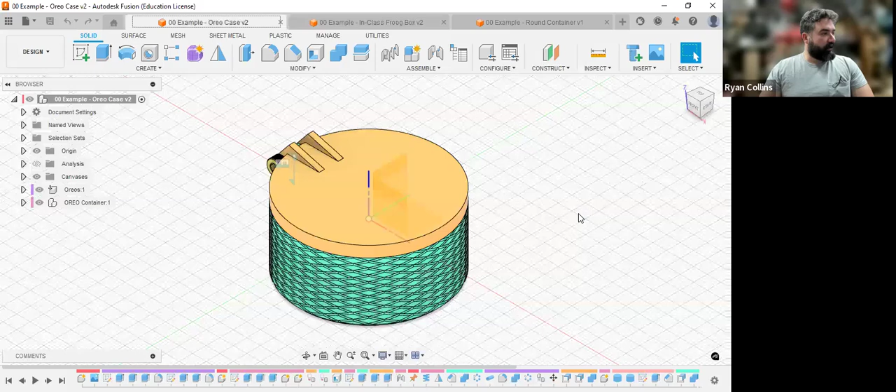We have a simple example here, and this is just on auto color. I can change back to the assigned colors, whatever. This is a rounded box, so instead of a box, it's a cylinder. But I can click and drag open the surface, and it is a container for a couple of Oreos. So when I say it must have a modeled object within, you're responsible for modeling an object, either importing it or if you want it to be something else, you're responsible for modeling that object, in this case, an Oreo.

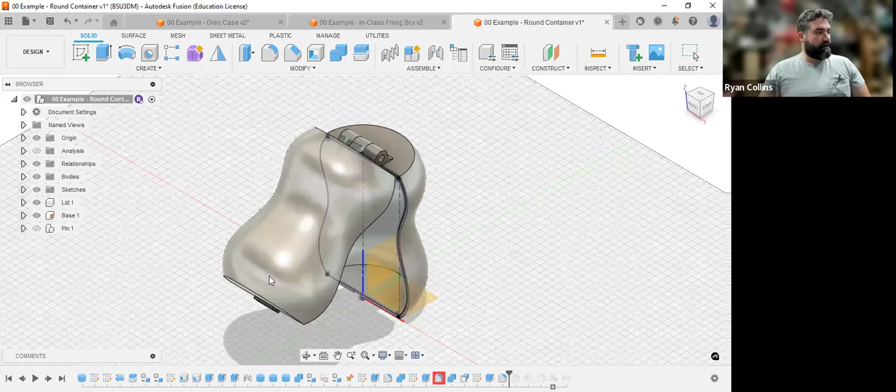Different example - I just have a section analysis on this. It does not have to be square or cylindrical. You can use the revolve tool to make a custom profile. This opens and closes as well, clamshell style. Now the orientation is just for convenience, but one of the things I want to show you in this is the hinge. It's a simple hinge, in this case with 3 lobes, 2 connecting to one side of the object, 1 connecting to the other side.

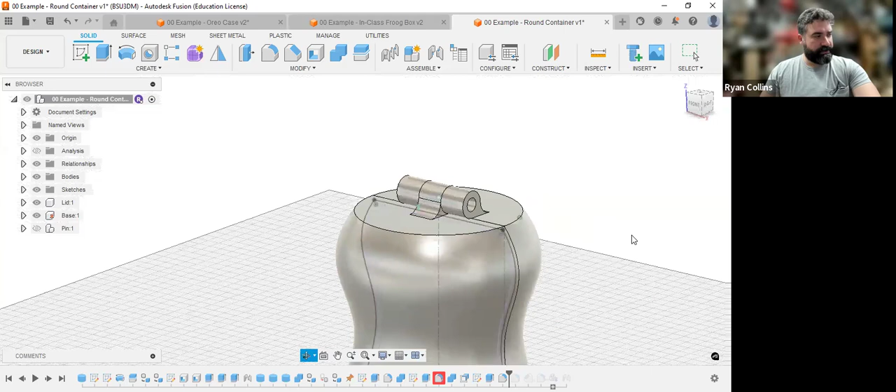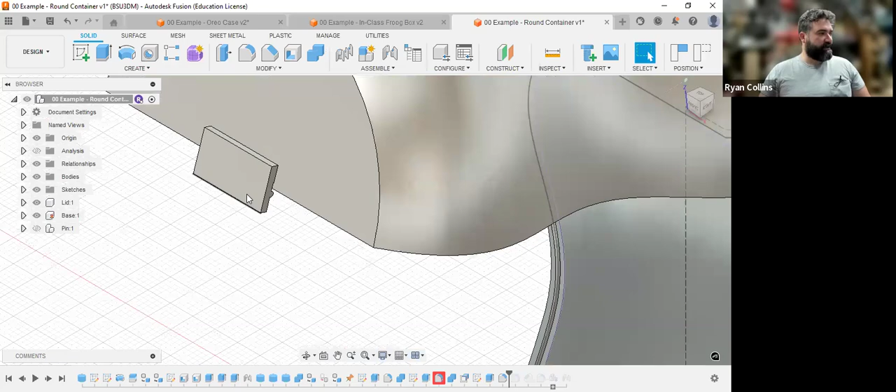Now, this example model has a hole through it. We're going to model something that's more intended to be printed in place with more of a snap fit that would not require a pin, but that can certainly be an option if you like. But the main thing is it opens and closes and also has some sort of a little hinge or catch, so it wouldn't just simply snap closed.

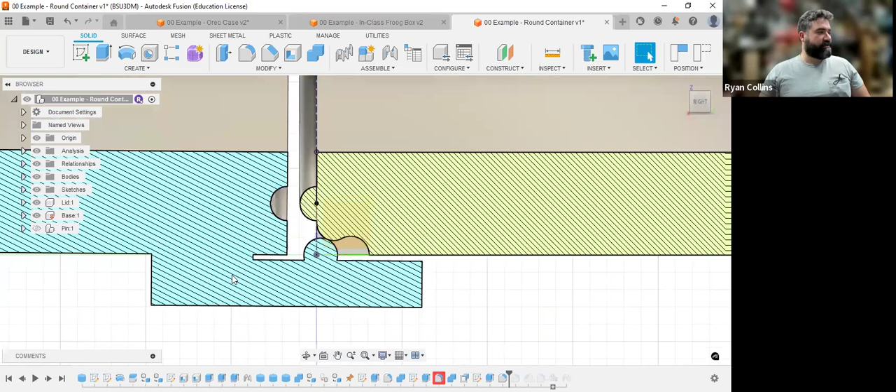If I look at this from the side, you can see this has a simple little model. When I open up the section analysis, you can see it actually has a little divot in there, something just close enough that would allow the plastic to bend and snap back in place and keep the whole thing closed. So you can see the clearance is just so. Now this one has this inset in here also that would technically make this more watertight. I'm not requiring that, that was just an idea, just an experiment.

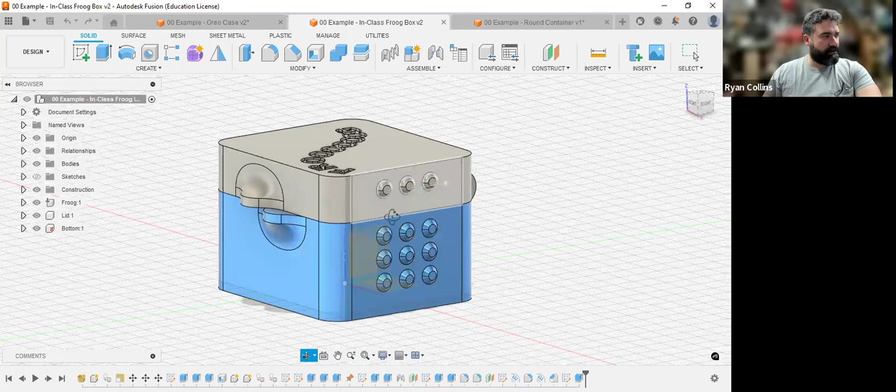Mainly, we're looking at something that, sure, can be a container, has a simple hinge - you can make this as complex as you like with as many lobes as you like. It needs to have some sort of surface features, be that texture or text, but it also needs to have some sort of a thumb catch, something that would help it open or stay closed. In this case, it's just like a couple little thumb tabs you could easily grab onto.

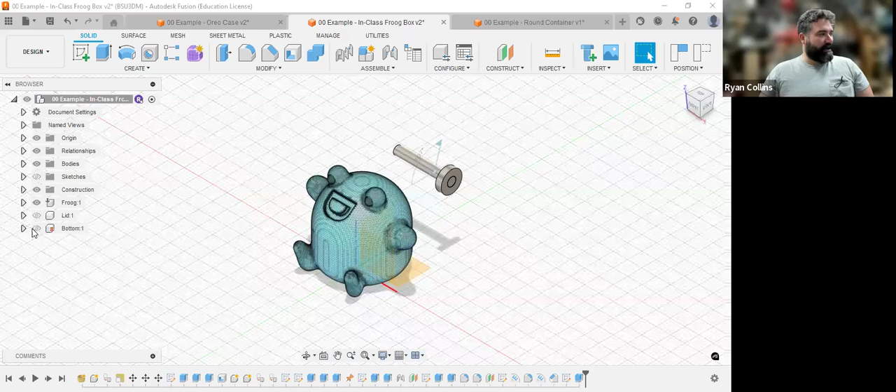Now with this project, this actually houses a ghost frog, and this is simply an imported model from a file sharing website. But in this case, for this model, I want you to actually model the object within. This is just a simple example of what we're going to do.

So to start, let's open a new project. Now dimensions and things are going to be up to you. I'm going to recommend starting with the sketch - we'll start on the XZ plane, snap in the middle. For this example, certainly follow along. We're just going to start with a center point rectangle right in the middle, and just for the sake of building this, let's just say 100 by 100, making it a square, that's okay.

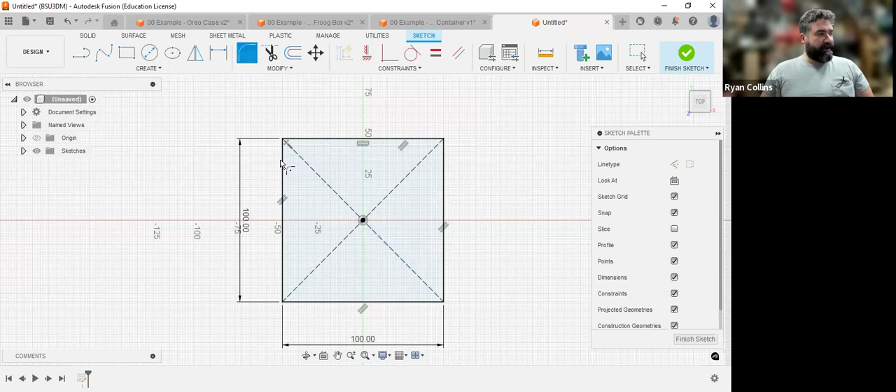All right, that's essentially done - that's just my rectangle. And I say this because if you want to add fillets, you could do that now. Remember, if I just keep clicking around, don't hit enter, keep clicking around from the sides, I'm going to get an error, but this will allow me to link all of my fillets together.

Now, if I click and drag or type in numerically, it changes all of them. Totally up to you, you can add fillets later. This is just an example. Yeah, I get the warning because I changed the constraints.

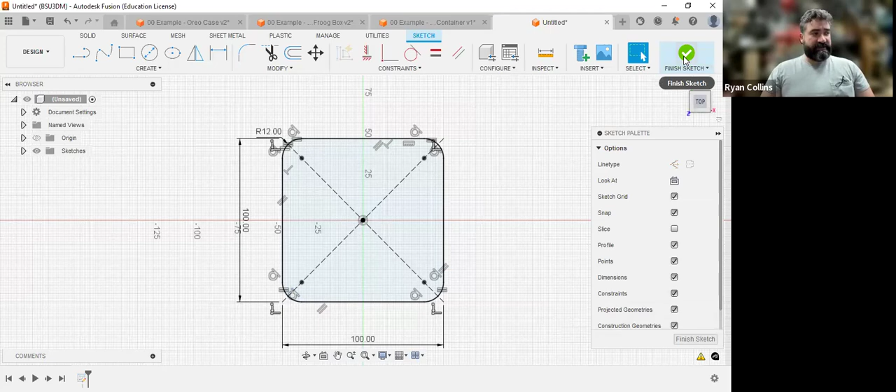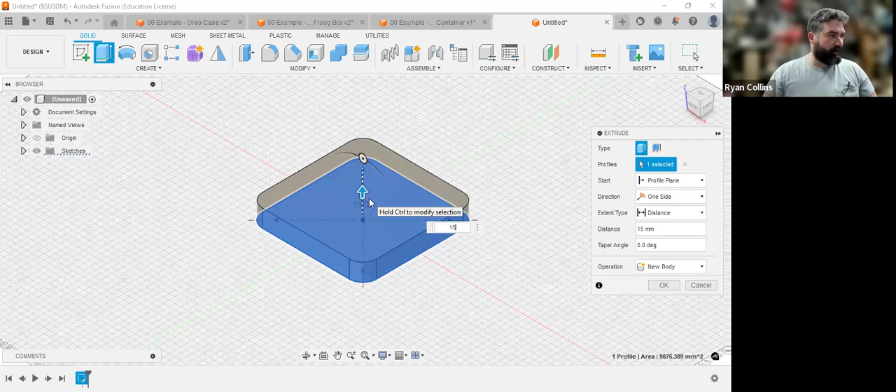It's all right, okay, that's it. Literally start with a sketch, just a flat sketch, what we're going to reference. Now, eventually we're going to need to make different components, but for now we can just make them different bodies. So I'm going to extrude up and down in two separate bodies. From the top, let's go up 15. Doesn't matter, new body. Now it's going to hide my sketch.

You can unhide that, but since it's the exact same profile, technically I could just extrude from the bottom also. Do it again, extrude from the bottom. Let's go down more like -40. Now make sure on the operation you do not do join, I want two separate bodies. Hit OK.

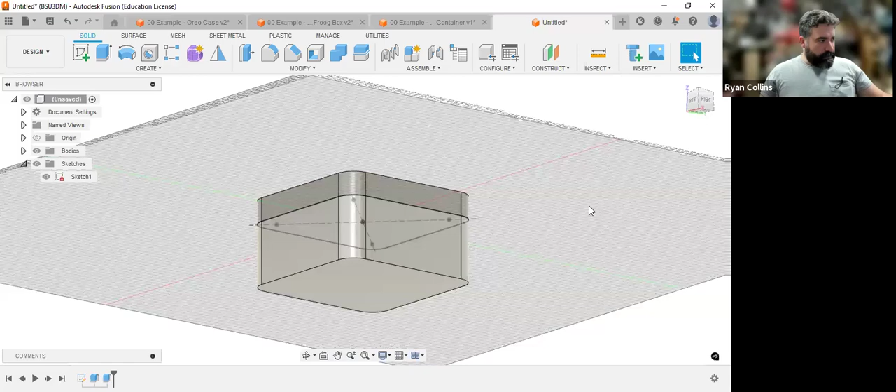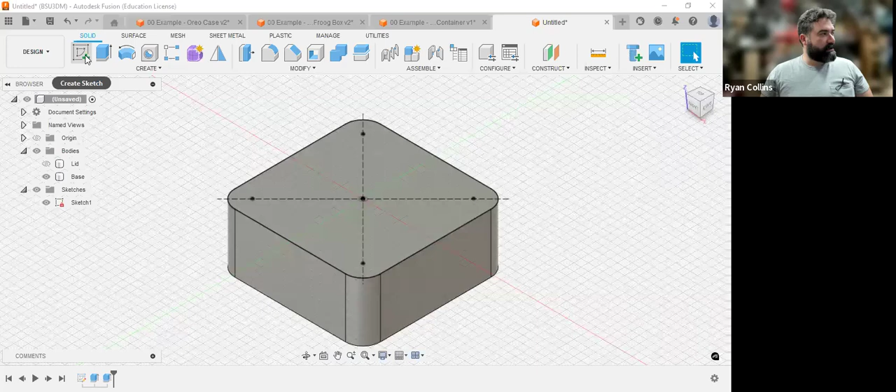From here, I'm going to hollow this out. To do that, you can add, I'll show you two different ways. Let me hide, I'll label what will be the lid and base. So for the base, what I could do is I could have brought up that original sketch, or if you want this to be more defined, we can start a sketch on that face, take the existing face, and do like an offset of the outline.

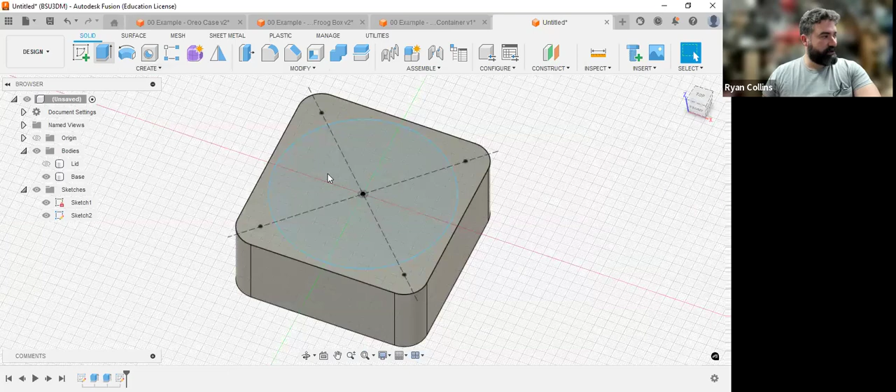First you have to project that, or if you wanted this to be like a custom profile inside, just for the sake of the example, let's put a circle in there. Finish that sketch. Extrude. Oops, not that, I want to make sure I select my circle in this case. I'm going to drag it down to cut.

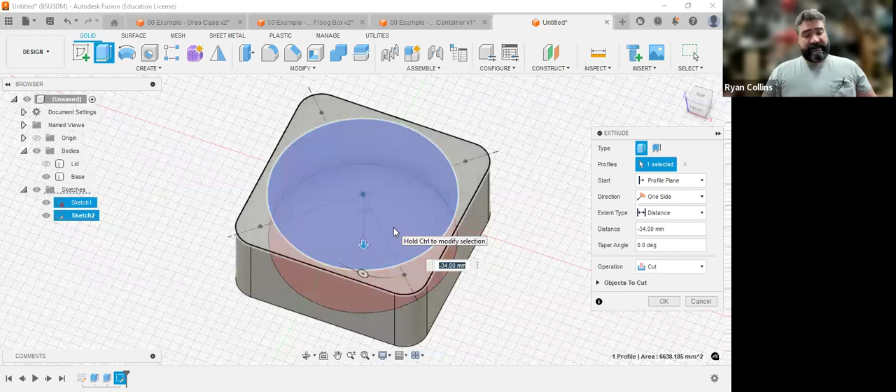Now one of the things with parametric modeling, if you drag down, you can one accidentally go all the way through, which isn't really a big deal, but you can always make it your own dimension. However, what if I want to make sure, if I decide to go back and change anything, because I based this off a sketch, I want to make sure I don't have to recalculate things. In other words, the less math I have to do later, the better.

So what I'm going to do for my extent type, instead of by distance, I'm going to go to object. I'm going to select the bottom face, which is going to cut it all the way through. But then I'm going to do an offset of, let's say like -5, which means it brings it back up 5 millimeters. Hit OK, and I'm going to throw in a section analysis so you can see what I'm looking at here.

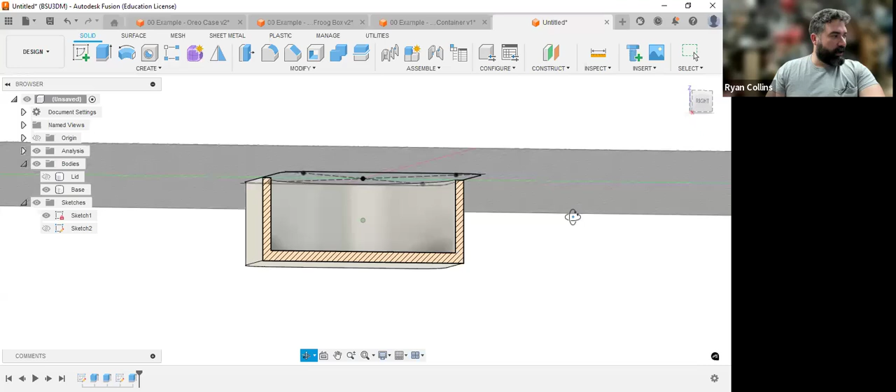So now, no matter what I do, that extrusion will always cut away from the bottom. So what I mean by that is, if I wanted to go back and change how far I wanted that bottom to be, instead of 40, let's make it 45. It's going to recalculate, and the depth of my extrusion is always going to be all the way to the bottom, save a few millimeters back. It's always going to be that distance away. So that's one of the benefits of doing it this way.

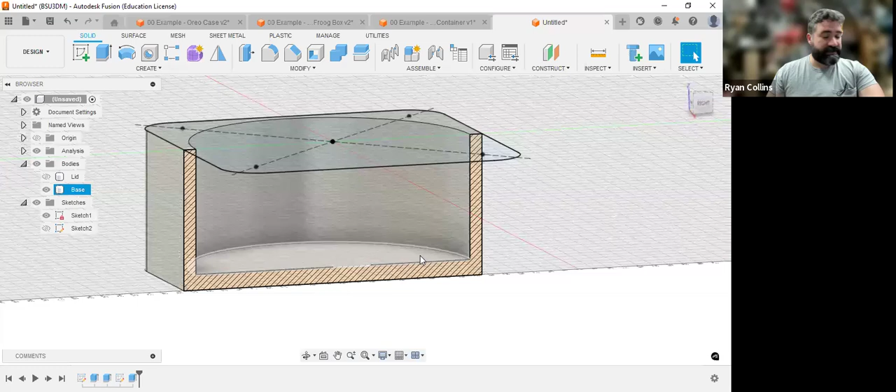The other example is, let's do the lid. And to heck with all of that, just use a shell tool, select the bottom face, let's say 3 millimeter wall, bam, instant extrusion.

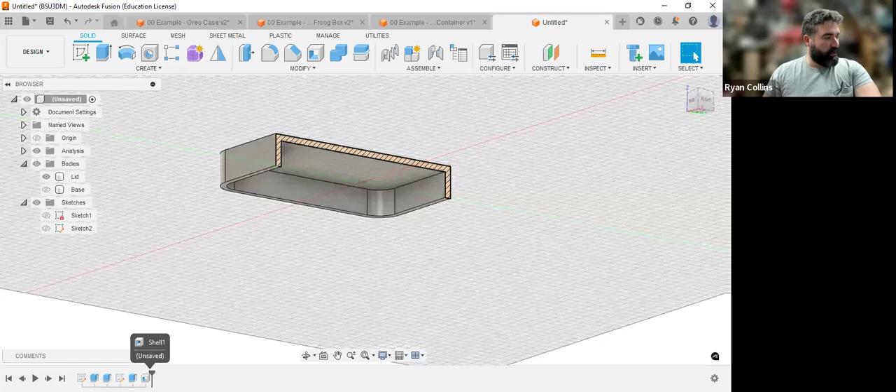And the cool thing about using the offset tool, the shell tool, is before I did that, what if I wanted to round out the top of that? Let's select the top face, and we'll say 5 millimeter fillet. Hit OK. Now when I go back to current, it recalculates, and because the shell tool works like an offset, it also copies and offsets that rounded fillet on the inside, so I don't have to make that copy.

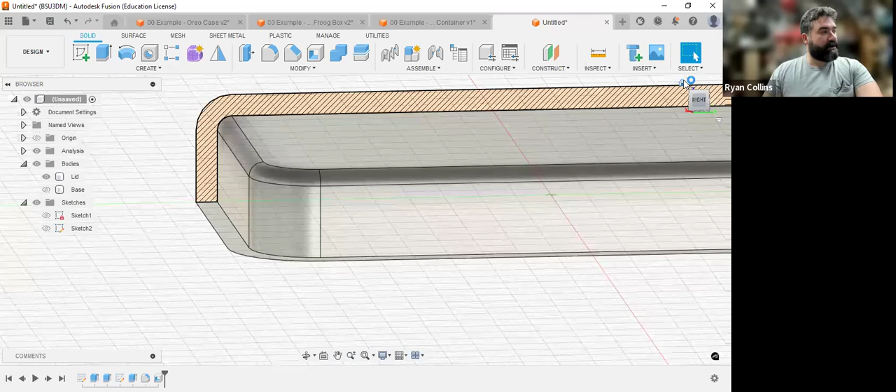So however you want to approach this, it's up to you. If you want to make it custom inside, use a sketch extrude. If you just want to use the shell tool, do that. So I'm going to pause here, let you catch up, make that model, and go from there.

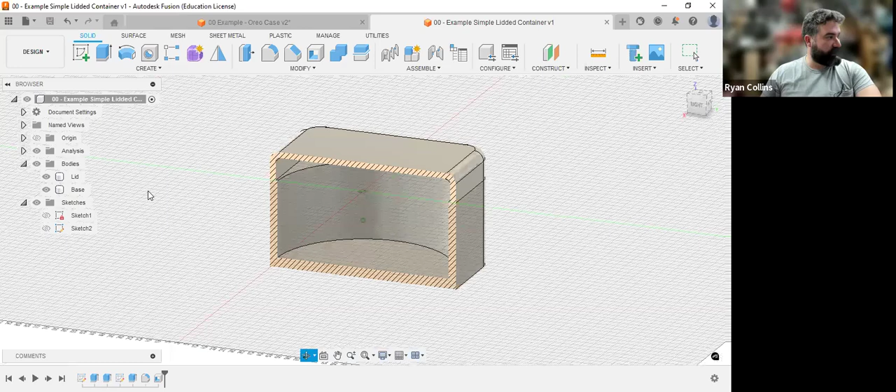Okay, so you made your container, you have it on two sides, you have your two sides. I'll just hide the section analysis so we're seeing the whole thing. Now again, this is important, it's much easier if you make this all, as usual, smack in the middle of your workspace, right smack in the middle of your environment, however you go about it. All right, so the next step is going to be...

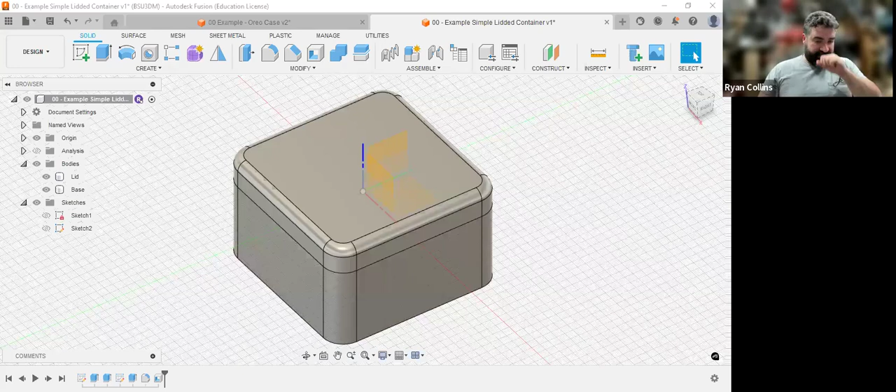I need to make the hinge. Now before I do that though, to make this much easier to work with, I'm going to need to make my separate components to drop this into. So the component tool is over assembly, the first one on assembly, new component, new component. And you can either select things or not, but I'm just going to label this lid.

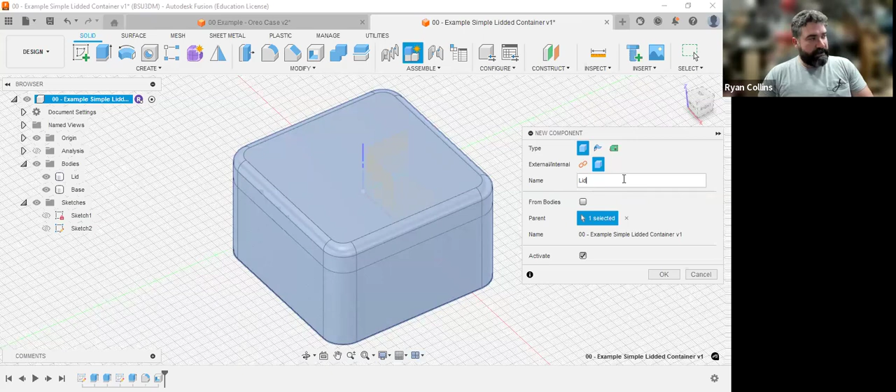One thing to keep in mind, you don't have to do this, but it's really easy to accidentally get a little lost. At the bottom of this toolbox there's a checkbox, Activate. If I don't uncheck this, when I hit OK, my whole project ghosts out. If you look down the project tree, the symbol for my component, which was just a square or a cube, has changed to a little stack of cubes symbol. That's the new components — there's more than one component now.

And the reason for that is it's automatic. Down here you have the new component, the lid I just made, and it is active — see the little circle with the dot in the middle? That's active. If I go all the way back to the very top and reactivate the entire project by checking that symbol, everything reappears.

Right now the component has nothing inside it other than its origin. If I go to New Component to make my other one — we'll say bottom — and uncheck that, it will keep it out here. The reason I did that is because if you keep both your components at the same level, you won't have as many problems. But if you don't, if you accidentally create your component while another component is active, let's just say component 3, now it will nest that component within that component, and you can very easily get lost in your own project.

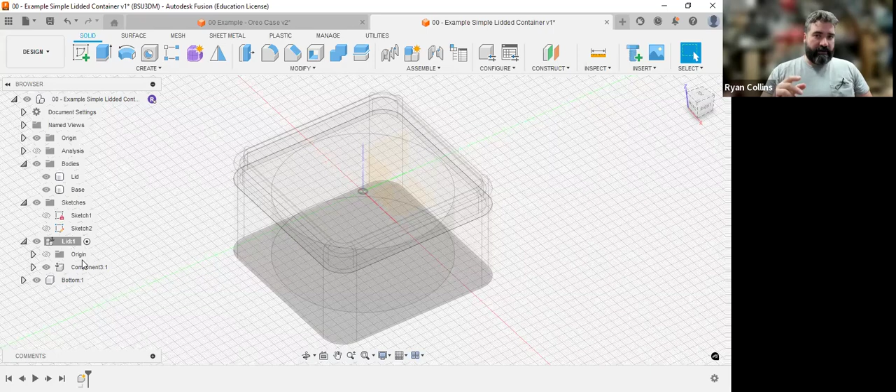Now, the reason you can nest them is for making assemblies. Say you're making a robot arm — you can put the hand on one component, and then within that component, each one of the fingers is on its own separate component. Stuff to that effect — that's why those are there.

So I'm just going to delete that — I don't want that other component, I don't want to get confused. I'm going to reactivate the whole project. And you could just drag and drop bodies.

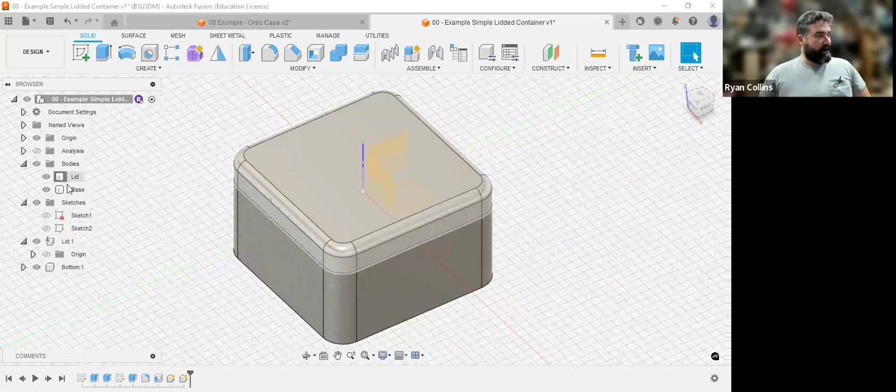Pretty great. So for the lid, I'm going to drag and drop it into the body of the lid, or the lid component — I just mouse over the lid where it shows it and drop it in. Drag and drop for the bottom, same thing.

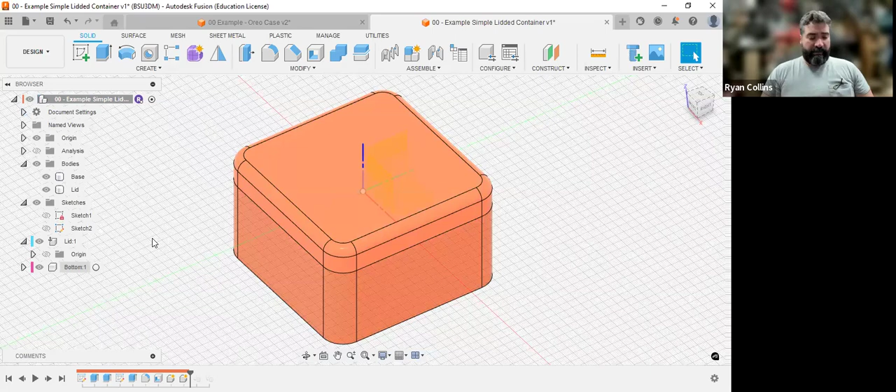Now, so far it looks like nothing changed. But when I use Shift-N — Shift, November on the keyboard — to auto color, it has changed. Let me go back before I did it — see, it's all the default coloring. You can see at the very left side of each component it'll show you the auto color that it's using. That's just there to help you make a little more sense of your project. But when I move them into their own components, it reassigns the auto color, so now each one has a different color.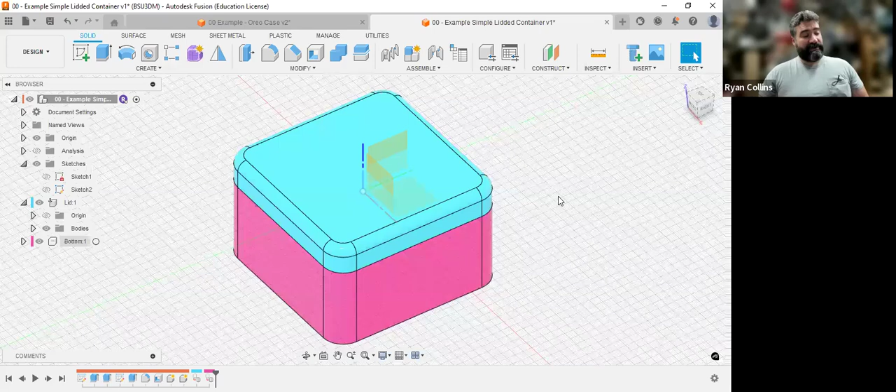Now that makes it pretty easy, because the next step is I have to have separate components to make the joint tool work. But in order to make the joint tool work, I need a hinge to build this off of. So with the entire project active — not each one of the components, the entire project active — because it's important that my sketch stays on the outside.

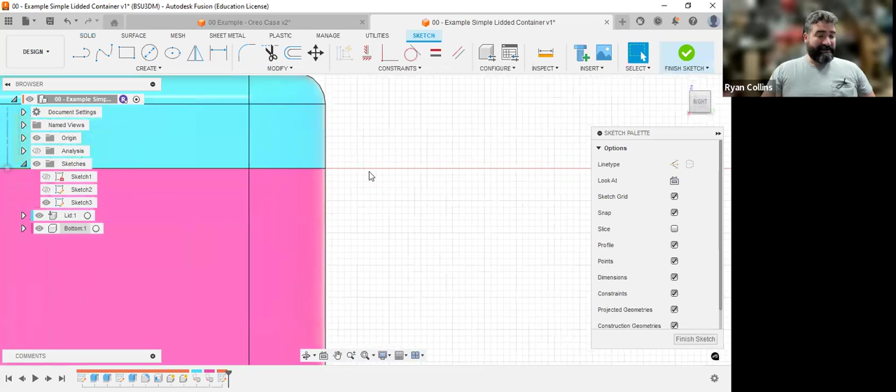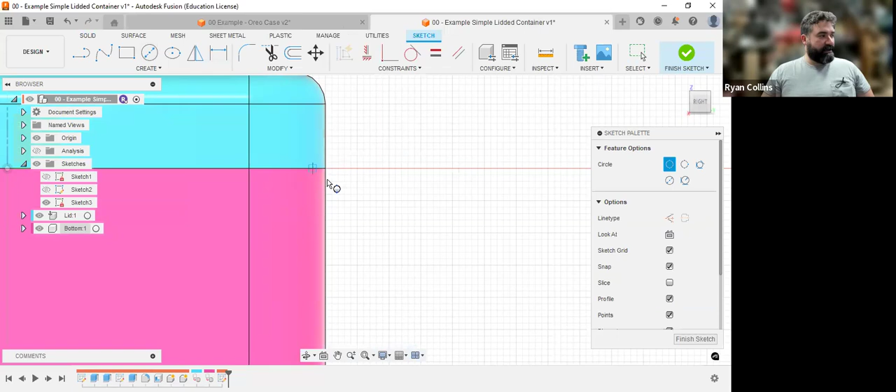So for my model, I'm going to start a sketch, but instead of using a center circle, I'm going to use a 2-point circle. I'm going to start right smack in the middle. Now, sometimes it's difficult to get to that because it's not wanting to select, so what we're going to do is project again — press P on the keyboard, or Create Project — and I'm going to copy both objects, the top and the bottom. Hit OK. So now if I hide those objects, I have a projection, but they're separate pieces, and now I have an easier sketch to work with.

So: circle, 2-point circle, start right in the middle where the hinge will be, and then we'll just draw outward. I don't know, let's say like 10 for now — you can always change this.

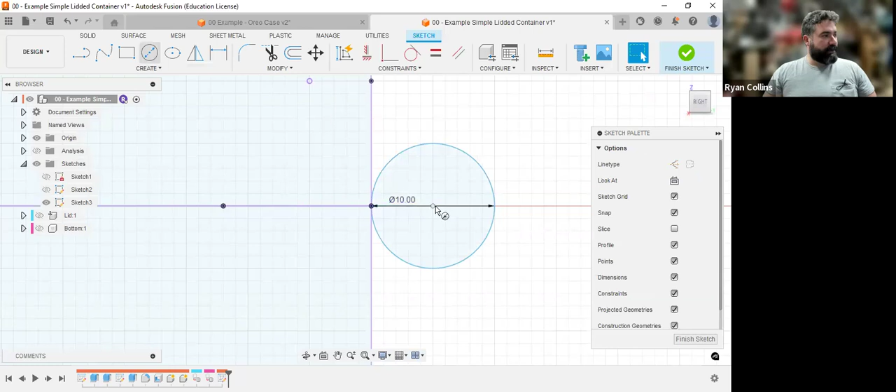Okay, now for reference, I'm going to start a concentric circle in the middle. I don't know, 4, 5, doesn't matter, whatever. And I need, that'll be what the hinge is, and I need 2 lobes.

So I'm going to use a line. Doesn't really matter where, I can start at the top. You can go all the way to the top, you can do it at a tangent, whatever. Do the same for the bottom. Doesn't really matter where, and doesn't really matter where. This is kind of one of those, yeah, that looks about right.

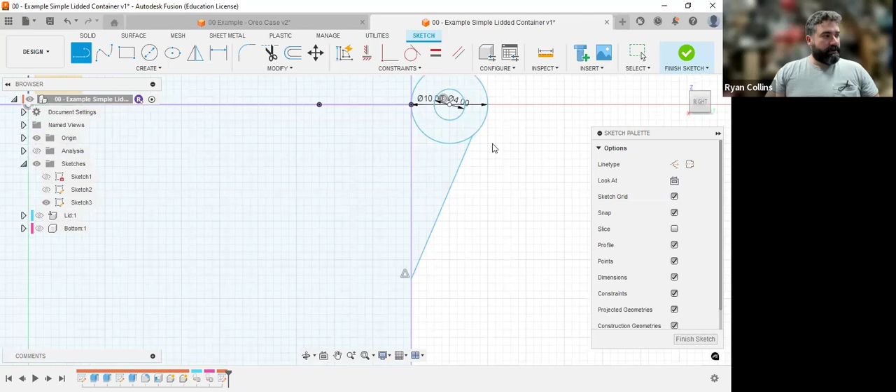If you want these lines to match, or better yet, to be at proper tangent, we're going to use a tangent constraint. Select the tangent constraint on Sketch, select the line I want to be a tangent, and then the circle that I want it to be a tangent to. It resets the line. It stays where it was down here, but it resets where it touches the circle.

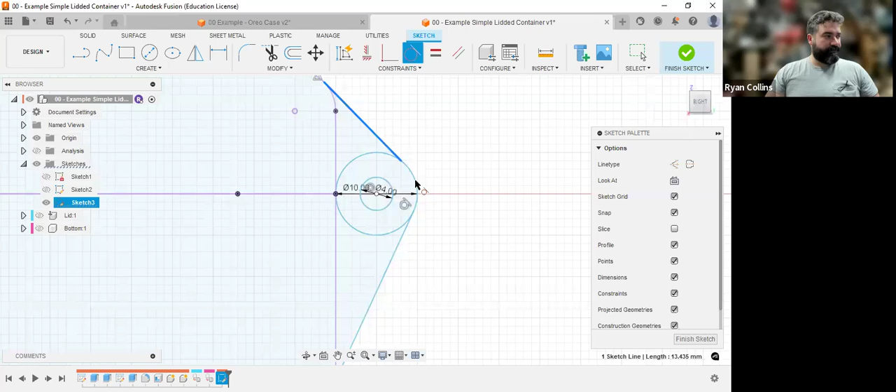Same thing for the top. Select the line, then select the circle. It just resets it, you have a little tangent symbol. If you want, you can do it at the top too, since I have this rounded. Select there, it shouldn't change anything. Yep, because it was already smack in the middle, but now it's both in the center and at a tangent.

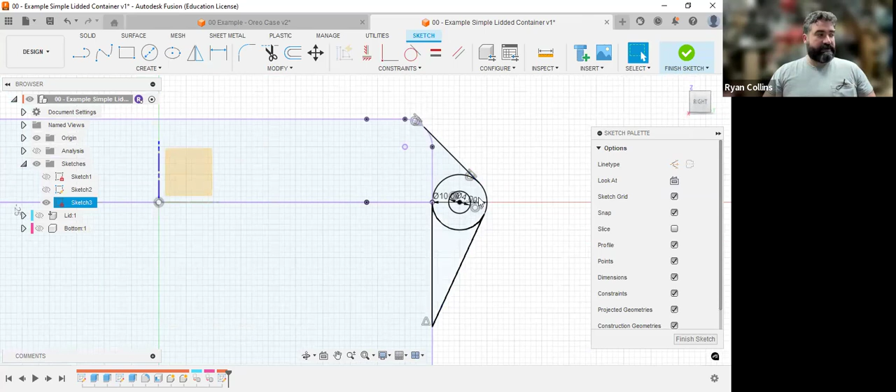And that's it. So a circle, hit escape to get out of that. So a circle, basically with 2 triangles, that's literally it, that is all the hinge is going to be. Finish sketch. Now I'm going to unhide the components.

There we go, so you can see that's all I'm doing. It's just a circle based off of right at the middle where the 2 halves meet, and a triangle for the top, and a triangle for the bottom, or whatever. It's up, you can go straight across if you want.

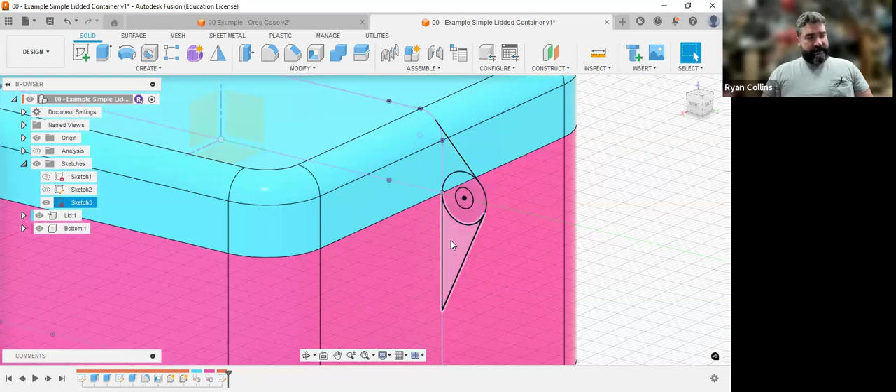Totally up to you. Now, I'm going to extrude these, but I'm going to extrude these with the component active. So I'm going to do the lid first.

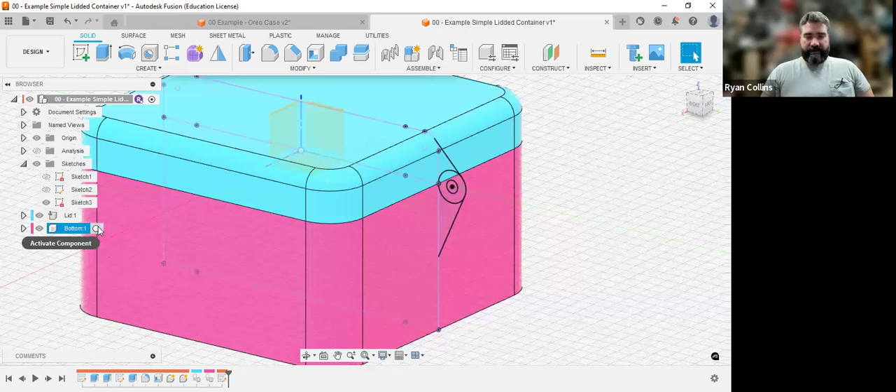Well, let's do the bottom, no reason, I just chose that. Okay, so I'm going to select extrude, but because my sketch, let me make sure I relabel that.

Hang on, my sketch for that, my hinge profile, is outside of both of these components. It's on the whole project component. That means I can access it easily.

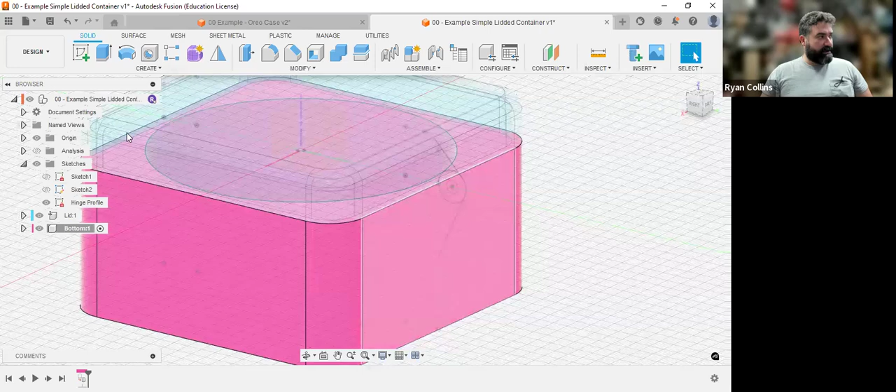So I activate the bottom of my project, my base of my container, hit extrude. I'm going to select the circle and the bottom triangle. Direction, I want it to go both sides symmetrically. You can just drag this out if you want.

But see how it's activating and it's automatically joining with the bottom. We'll make it even, we'll make that 20. It is going to join, bottom of the toolbox, join.

And because I have the bottom component active, the bottom is both literally the bottom component on my project tree and is labeled bottom, I will have it connected. So I hit OK, there we are. If I reactivate the whole project, now you see that has connected to the bottom of the container.

Now I need to do the lid. Let me unhide that hinge. I'm going to activate the lid. This one you have to do twice. So I'm going to hit extrude.

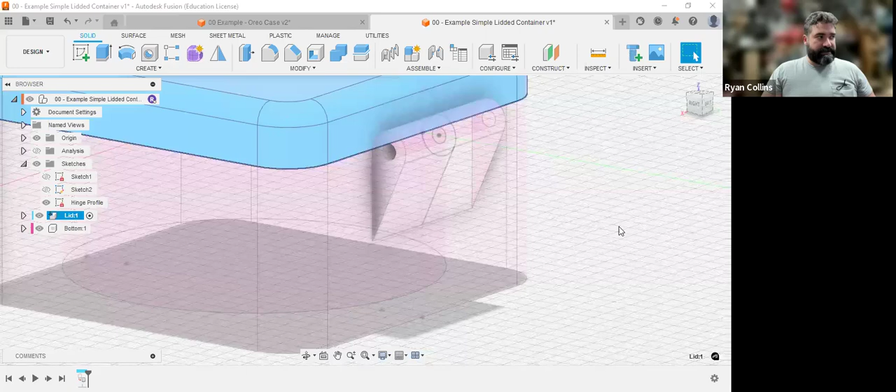If you need to, hide the bottom for a moment. I want the circle and I want the top triangle. But I need to unhide the bottom because instead of starting at the profile plane, which would just extrude right there, I want this to start instead at an object. So the exact opposite way we made the recess inside the bottom, start an object.

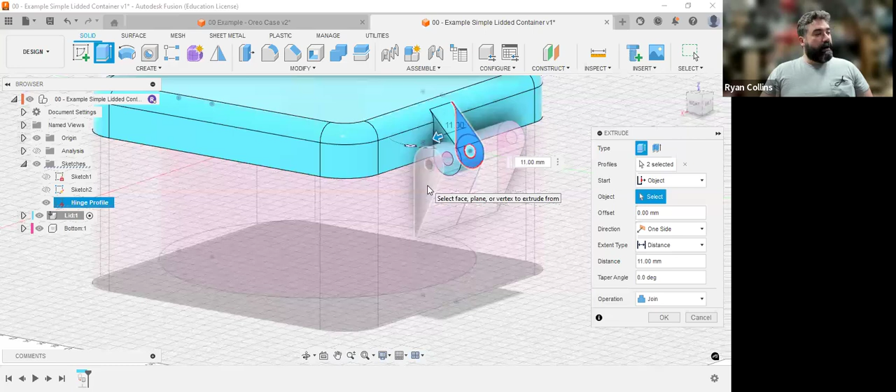And I'm going to select the face that's facing me of that hinge. And we'll just make that like 10. I don't know, we'll keep it just even numbers. See how because I have the lid component active and I started at the face rather than where the sketch starts from, and operation is join, which automatically happened, it locks to the top.

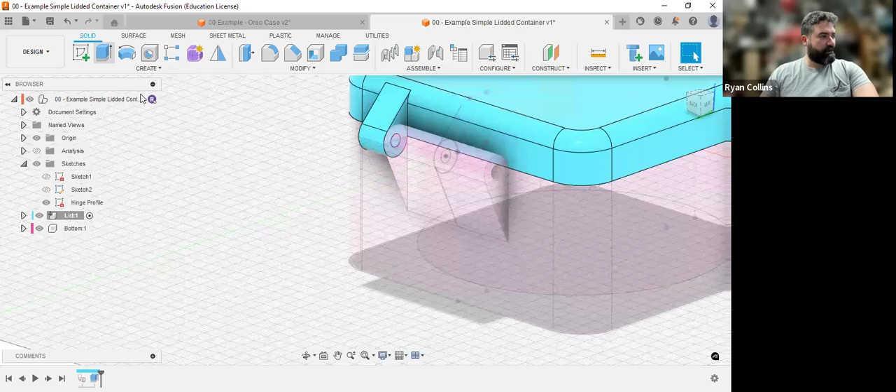Great, do it again, orbit around. Repeat, extrude, I need the little circle. And I need that lobe. Direction, yep, start profile plane object.

Select the other side. And now we just want to go -10 because it's going the opposite direction. Still have the lid active. Join, good.

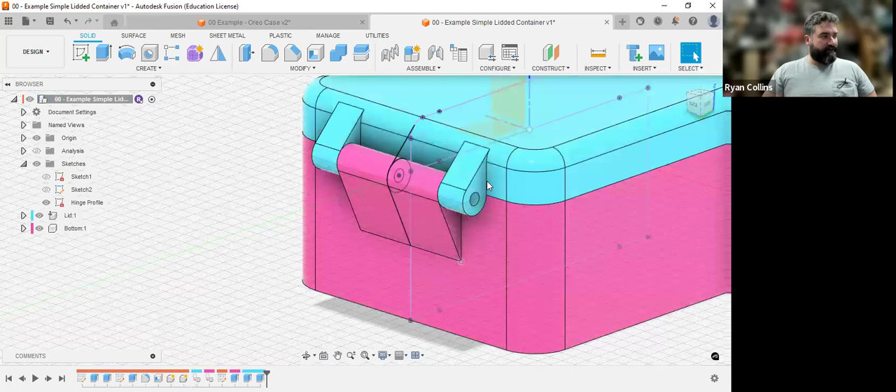That's it, reactivate the project. Now you have them automatically joined. Just going to hide that sketch. Automatically joined, I've got the base and the lid. So let me save that, give you all a chance to work on that.

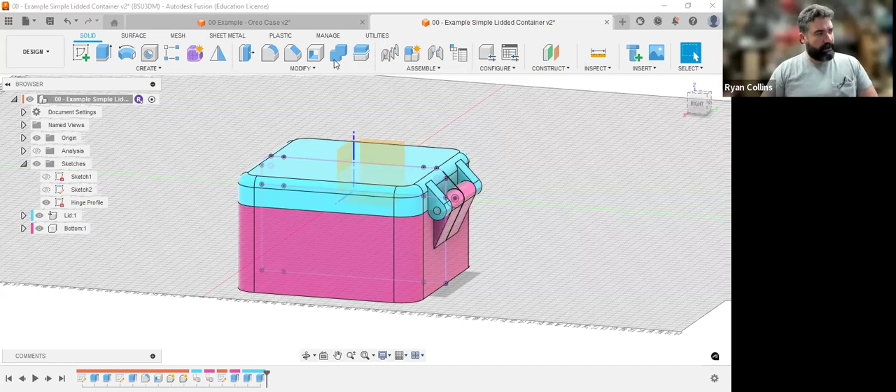For the sake of simplicity, it's a little bit easier to make these hinges hollow. I'll show you how to model a pin. We'll do the snap fit one later since it takes a couple extra steps, but I want to show you how to add your joint to this project.

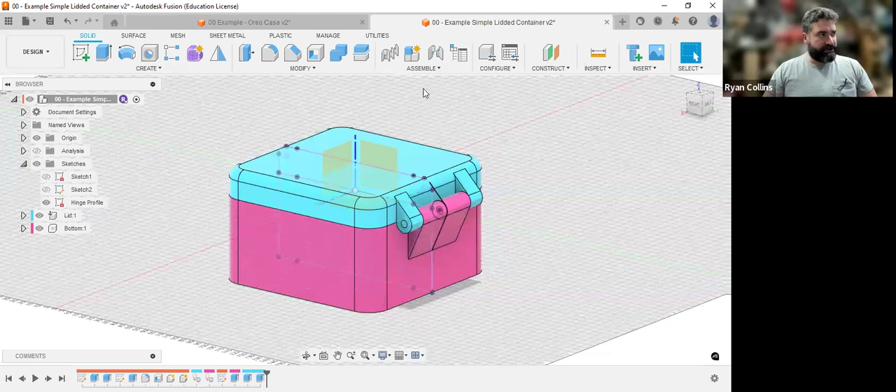Let me hide the profile. Now, what you want to do first is reactivate the whole project if you haven't already. Make sure you're not on the hinge or lid or bottom or anything like that - all the way to the top, checkbox, activate the whole project.

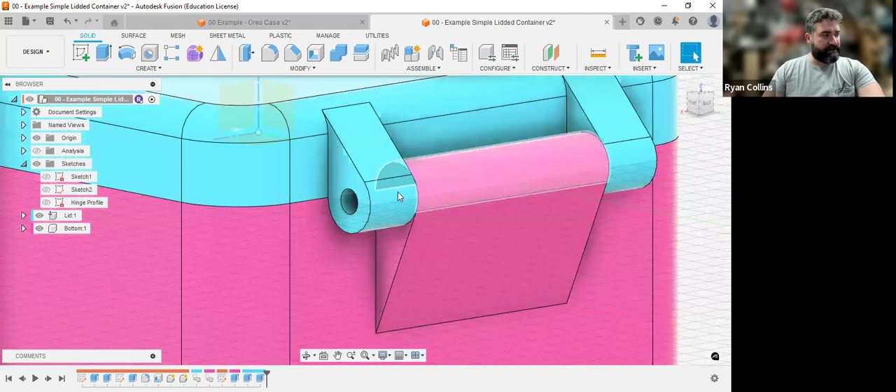We don't need a pin or anything to start it, but we did need these faces to match. Now, to use the joint tool, you have to have two different objects, bodies, in two different components. It works off of the different components, not just bodies - that's an extremely important detail.

I'm going to select the joint tool. The defaults you can see the toolbox has two different options, position and motion. Position obviously we'll put there first. Now you have a couple options - as I mouse over things, you can see all kinds of stuff starts getting selected.

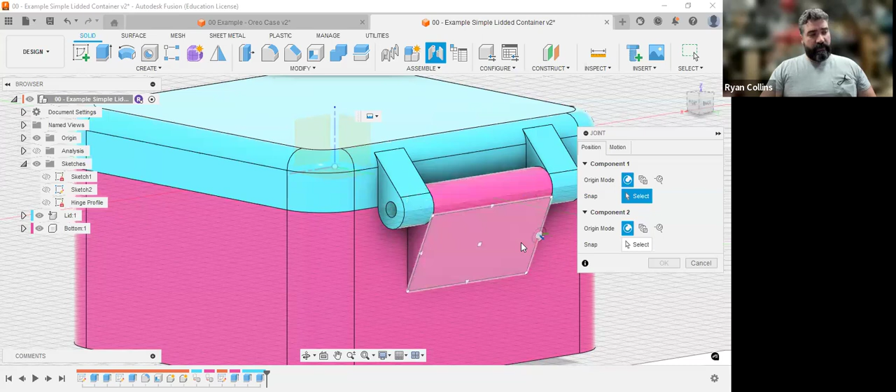If you want this to be more like where it's supposed to be, we can mouse over and you can see I'm actually selecting right in the middle. If I turn on section analysis, you can even see it's right there also, but you do not have to have section analysis active for this to work.

You could also use the other option here, simple selection or between two faces, which is literally between two faces. It's up to you if you want to use that - might be easier for the top. But the main thing is what you select first is what will move, and what you select second is what it moves against. So we want to make the lid the thing that will move.

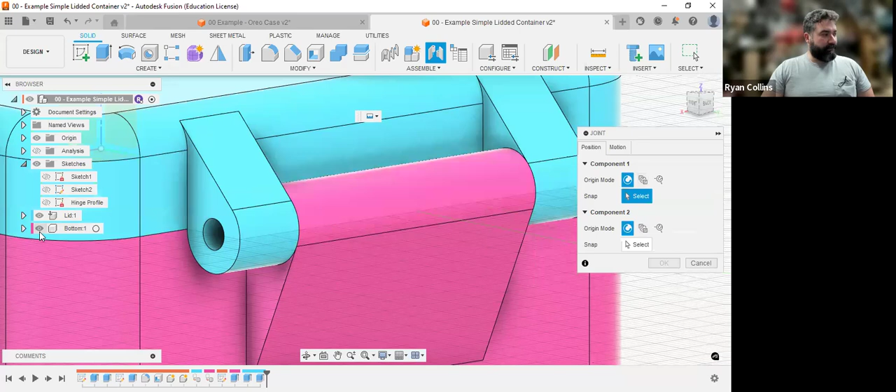So I'm going to hide the bottom and select in here. Now you can technically just select on the edge, and that's all right. When I mouse over here, you can see because I need a shared space where both of these are intersecting, or abutting, and that's right there in between. So to get to that point, it's easier to just hide the bottom.

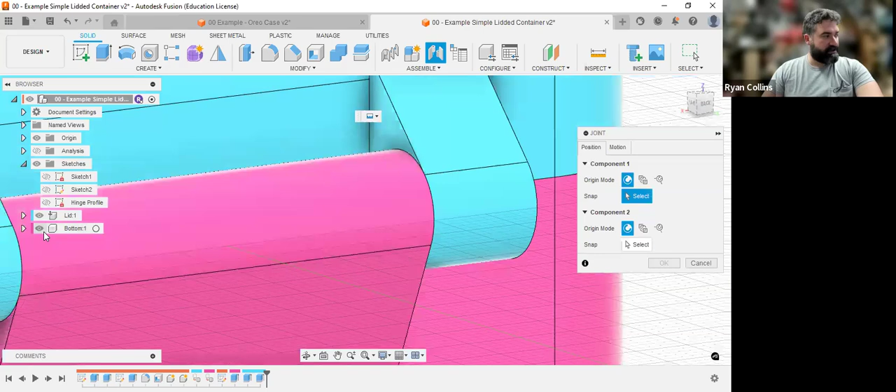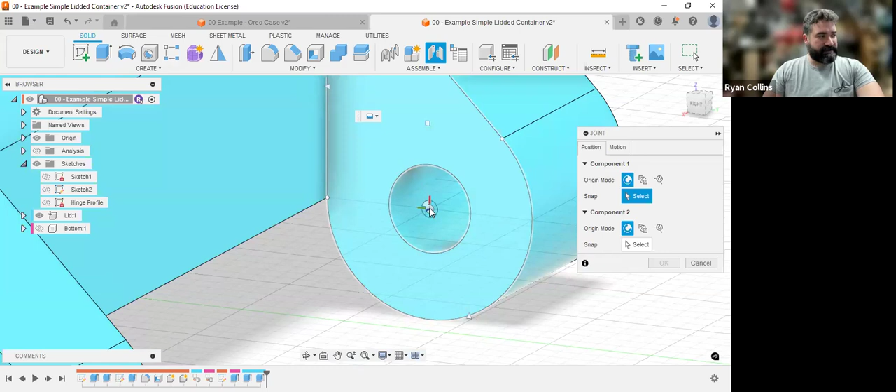When I go to mouse over that center, the snaps work a lot better than they used to. But if you're having difficulty selecting a point that's literally in space in the center of this tube, what you can do is mouse over the surface you want, press and hold Control, and that locks your selection to only being able to select anything on that plane. So now I can select right there, and the lid ghosts out.

That's okay, unhide the bottom, and I can select the exact same spot. If I hide the lid, exact same spot - having difficulty selecting, so mouse over the surface, press and hold Control, locks it there. Unhide the lid.

Great. Now we're going to switch to the other tab, Motion. There's a variety of different ones - we're going to use Revolute.

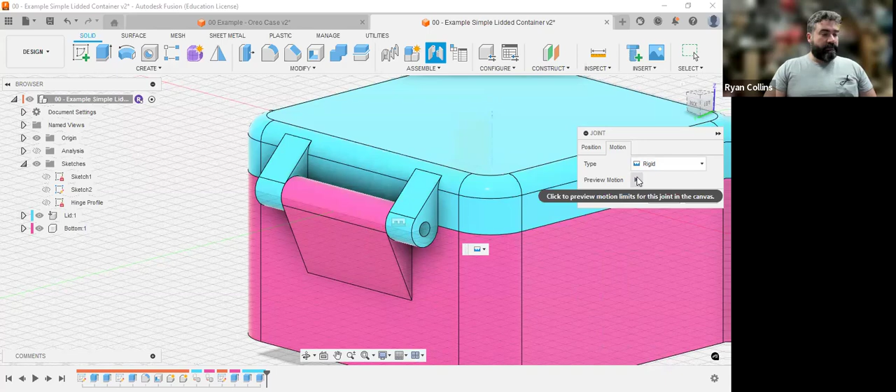Rigid is for if you're like gluing these together. You can preview them - Rigid just shakes and gives you anxiety. But use the drop-down tab, select Revolute, and now it's going to revolve around. If you got this mixed up and accidentally selected the bottom first, you can use this flip tool and you'll be okay, it'll automatically change, or just redo the thing.

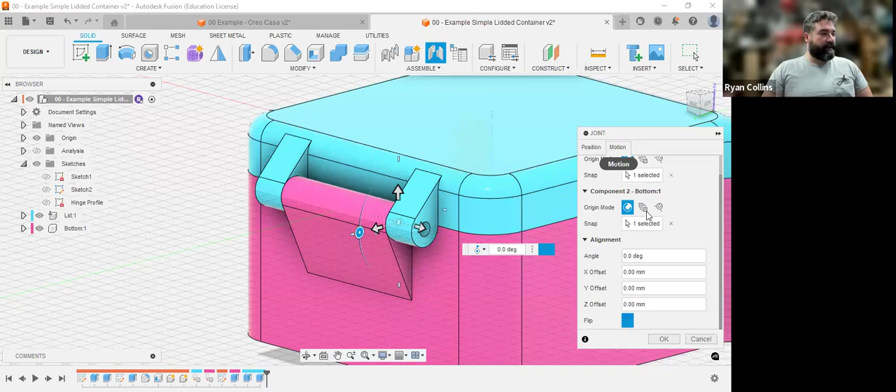It's whatever you want. Now obviously we don't want this to clip through the project, but that's okay for now - we'll set the motion limits in a moment. Hit OK. Save. Joint added.

Now, I showed you before, you can click and drag this, click and drag the lid, and it'll open and close. However, if I do this now on our project, it's going to move everything.

Of course, I said that, and now it's not moving at all. So, oh, weird - now it's opening and closing the bottom. Huh, don't know why that happened. All right, well, let's reset that, especially since it was working fine before. That is extremely odd.

So let's go back into the joint tool. It creates a new one on the project tree, and now it starts a new folder called relationships - it used to just be joints. So more stuff to go into.

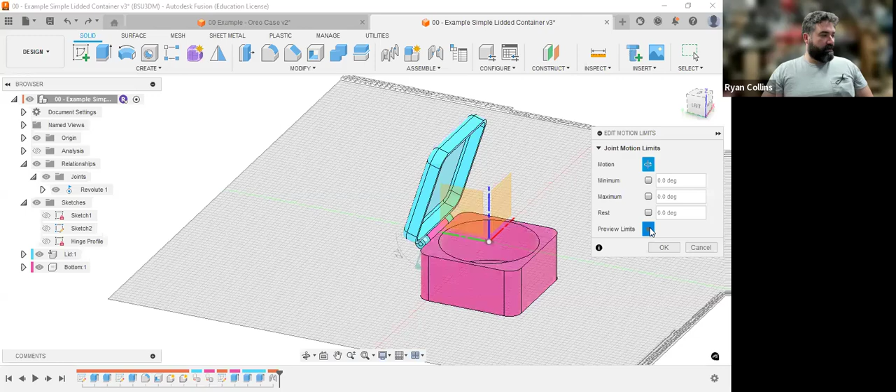To edit this, I mouse over Revolute and click there. It's so weird that when I click and drag it's opening the bottom, but on Revolute it's doing the top. So I don't know.

But we want to set the limits. Now you can either activate these and then drag these little flags, or you can do it manually, adding in manually. If I hit preview limits, now it's going to open and close.

Now, of course, I don't want that. I need one of these to be zero.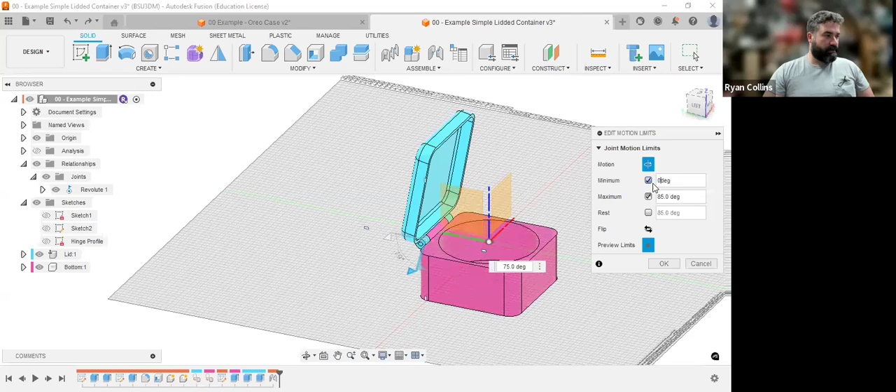There we go, now it will only open and close that much. If I flip that, that's definitely not the way I want that to work. So the first one should be 0, and the other one could be whatever you want—80, 180, whatever.

Now it opens all the way. Hit OK. That is super weird, I have no idea why it keeps swapping those. Something is wrong with this.

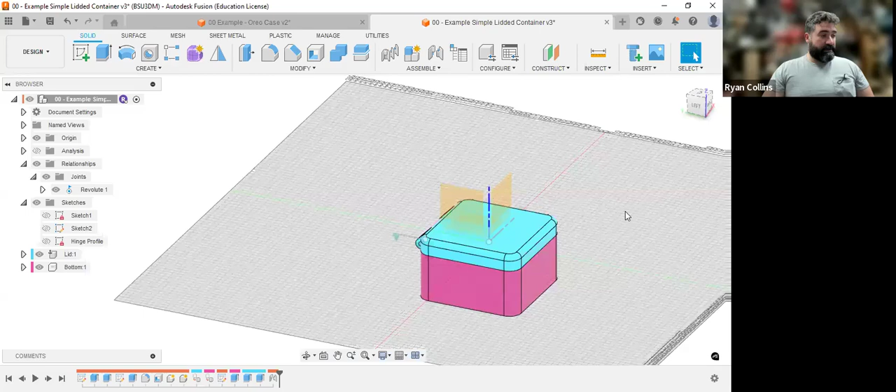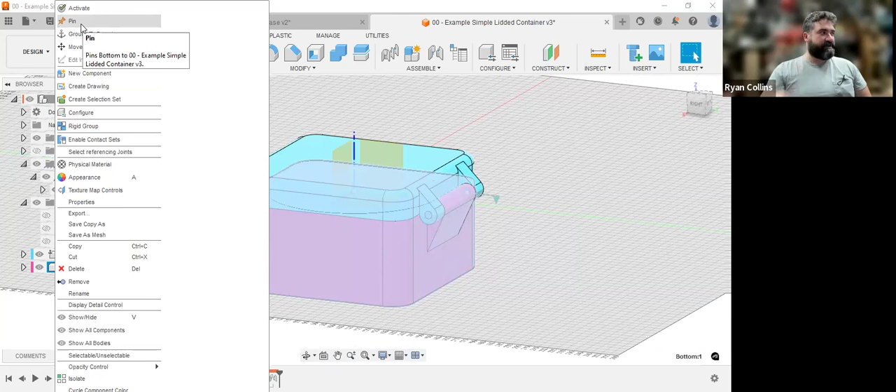But all right, so we have those. Now the one thing we need to do still is, normally this would just move all over the place. Oh, I see, because it automatically anchored that. Okay, that's okay. Normally what we'd need to do, we would mouse over bottom, right click, and I want to pin that. So I'm literally pinning it in place.

That would lock it there. Now the problem is that for some reason the lid got grounded, so that little anchor symbol on there, I need to get that away off of there. I'm gonna right click, unground from parent.

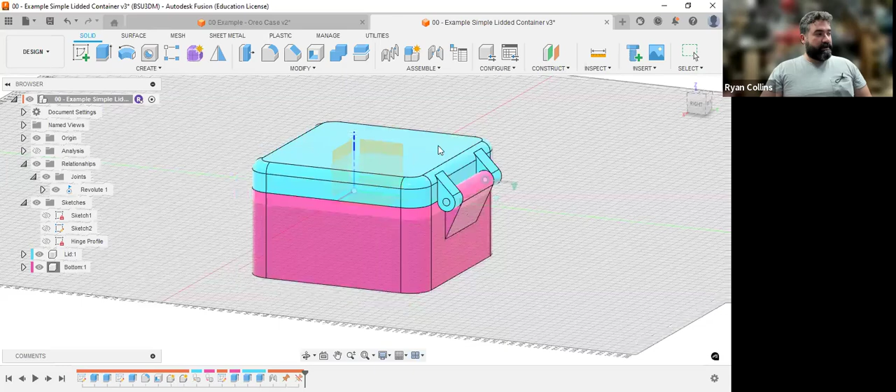Now it works properly. And if I had not pinned the bottom, let me unpin it, what was supposed to have happened, or what would usually happen, now it clicks and drags everything all around. So you need to have one of them locked in place.

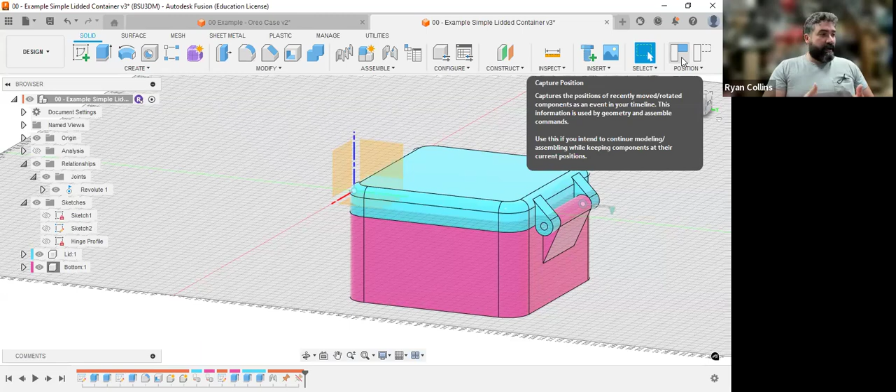Now, when I did that, you noticed if you look at the upper right-hand corner, 2 new symbols popped up. When you move stuff around, there's capture position, which works when you're working with the joints—if you move something to a new position and you want it to stay there, that's the default setting, you select capture position. If you select revert, it's like Control Z or Command Z, it just plops it right back where it was.

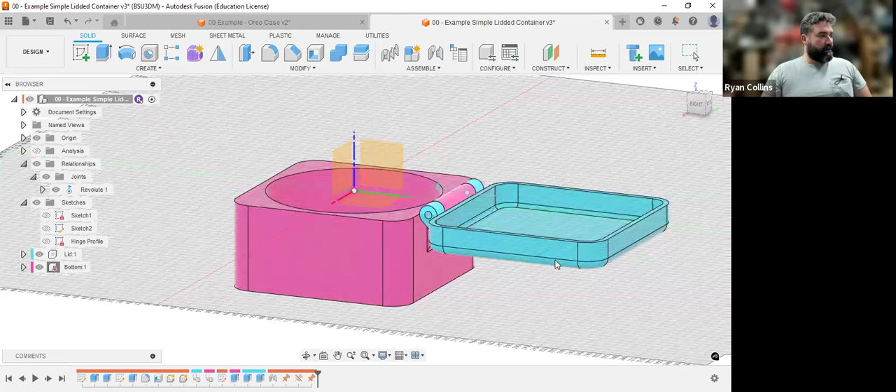All right, so right click bottom, pin. There we go, opens and closes. That's really what we want out of that. Now, I showed you that I wanted to, and let me save that. Joint limit and pin. Okay.

So I showed you this, and the intent was to make a model that had these joint pieces built in. But honestly, for today, let's just make them apart. So what we can do in this case, let's just literally model a pin. I'll go to create, and I'm just going to make a cylinder.

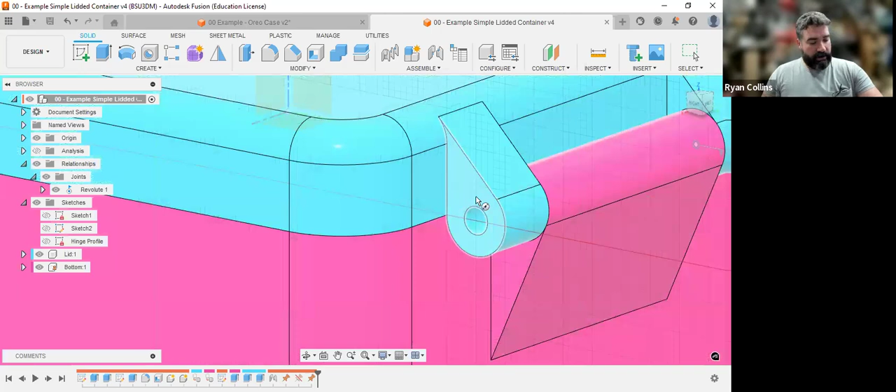I'm going to mouse over this surface here. If I'm trying to select on that plane, remember first you have to select the plane, and then if I mouse over, it's going to automatically find center there. And let's just drag that to where it is, 4 millimeters. And I'm going to drag this pin all the way through.

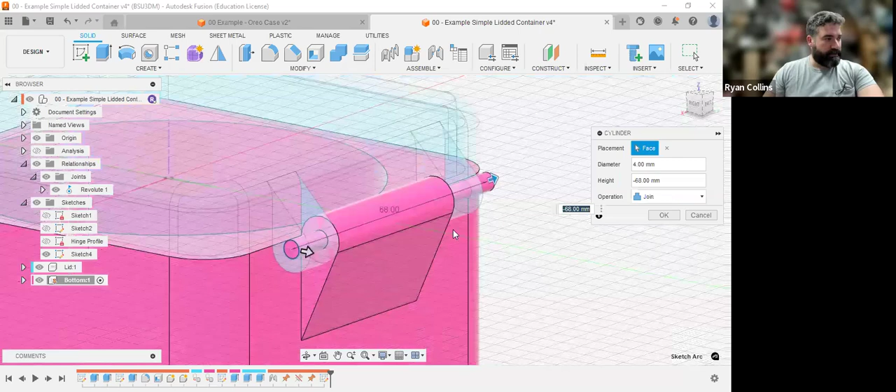No, this one doesn't have that option. So we'll just drag it all the way through, and let's make it fit. But make sure you do not select join, make sure it's new body. And if I had joined, it was going to try and match it with the bottom object.

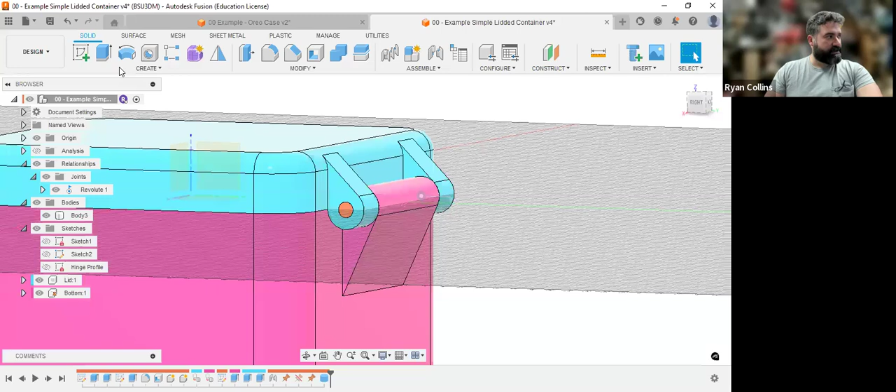But now, because my whole component is active, it makes that little pin there. And you can, of course, add like a little head to it. So let's hide that, and I'm just going to add another cylinder. Or remember, if you right click, you can repeat the object or the last tool. Put it in the center.

I don't know, let's just put a little head on it. Let's do like 6, and then I don't know, 6 and 6, 6, 5. Join. So now it's just literally like a little pin. Okay, and there you go. That's a super simple container.

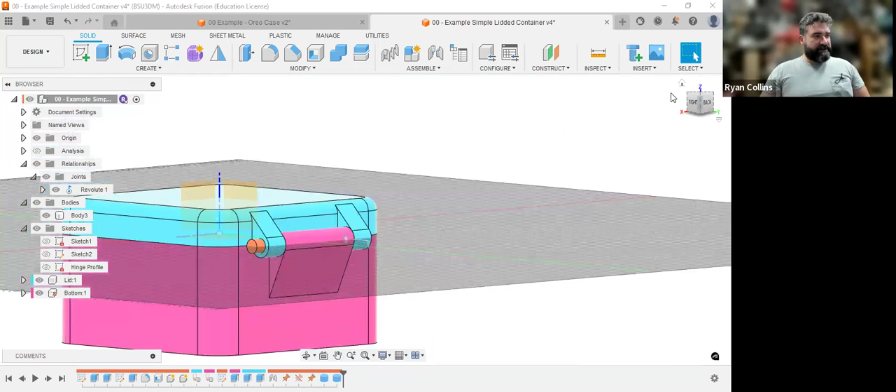It opens and closes. In this case, it has a pin in place. We will make this model more effective later. But there you go—practice, play with it. Do a test piece, make a test piece.

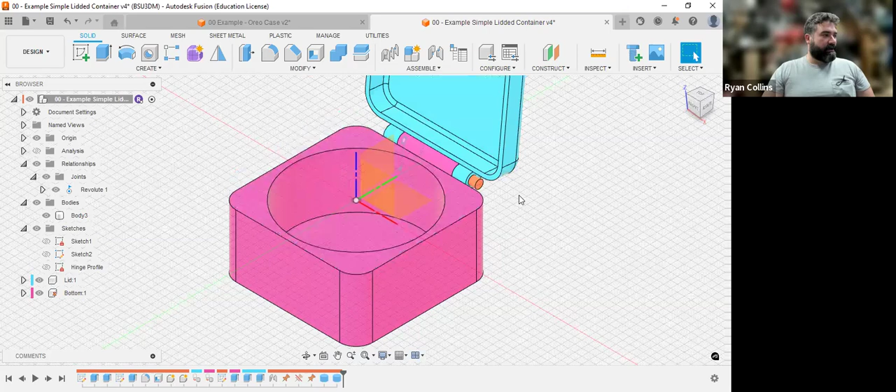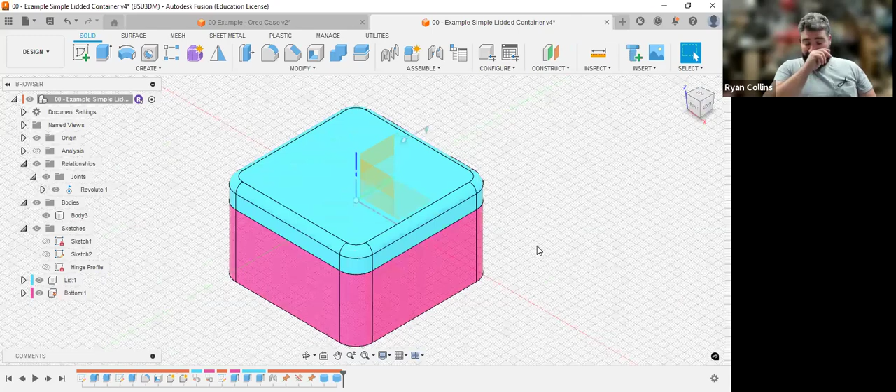You could hollow it out however you like. If you want to extrude, sketch and extrude, that's fine. If you want to use shell, that's fine. Make sure the shell happens before you make the hinge, otherwise it will try to shell with that hinge built into it. So however you want to work, totally up to you. Make a simple box, figure out how to add the hinge, add the joint tool, go from there. Think from there. Don't forget to save.